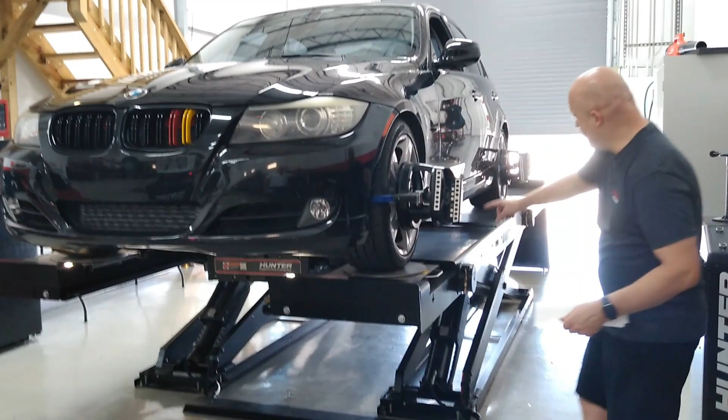It is made by Hunter Engineering. So what is different? This is the latest, greatest that they have, and this is the one with the full options, which has the LED lighting up underneath. So when the technician is working underneath the vehicle, it's very user-friendly for them, where they don't have to have a light.

And on each corner of the vehicle, it's got air chucks, and it fills up the tires by the manufacturer specification by VIN. And this machine is all up to date. It's got software updates 3 to 4 times a year, which we are married with Hunter, and they give us the updates, just like if we're a franchise dealer, like BMW. They give us the update because we have a good partnership with them.

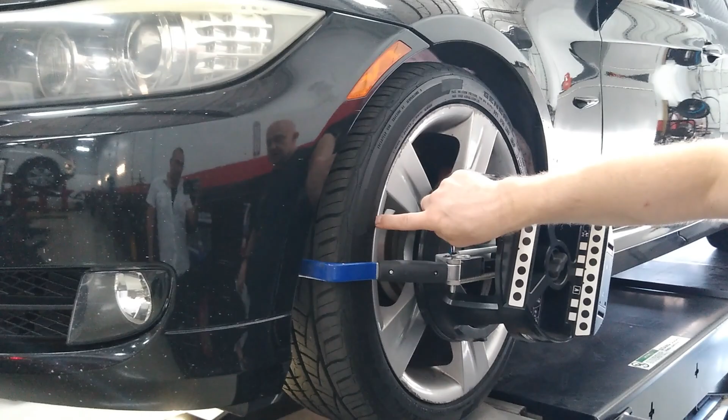And to add to this machine, this has the wheel touchless system where these claws mount on, they grab the tire instead of the wheel. Because if you have really nice wheels, the old styles that grab onto the wheels can scratch and chip your wheels. So this is the latest, greatest. It goes off the wheel. It is covered by a rubber gasket here, so it will not damage or scratch your wheels, and grabs by the tire for true fitment.

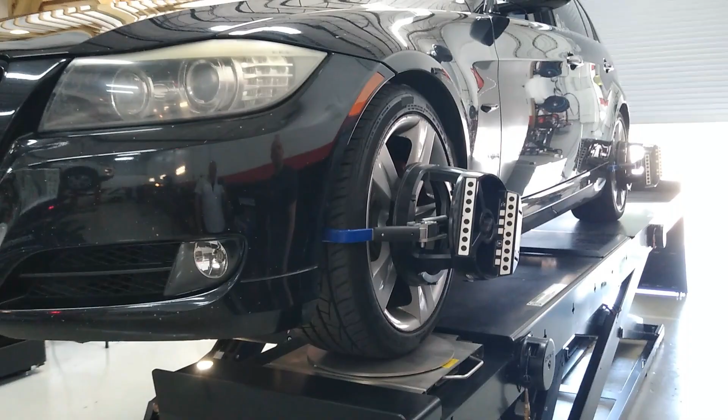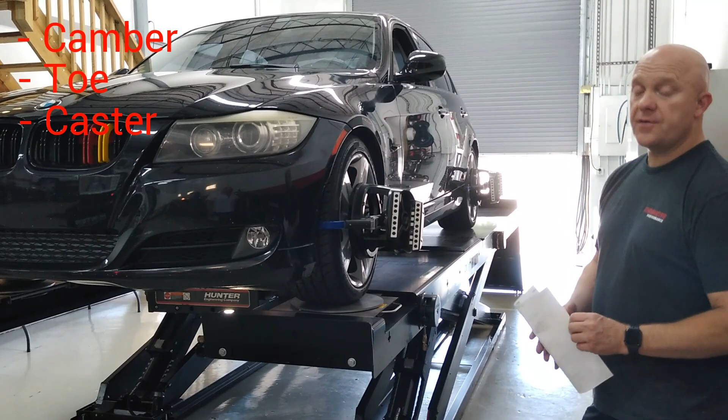So what does the alignment consist of? All alignments consist of camber, toe, and caster. And how do you get all those measurements? The measurements are from the factory, where Hunter has the relationship with most manufacturers, actually all of them. There are some adjustments for camber and caster, depending on the make and model of the car. And we do everything we can within limits to meet all the specifications for the manufacturers.

Okay, can you explain to us what toe means, what caster means? So toe is typically the front tires and the rear tires, how they point in and out. It's like if you're skiing and you snow plow, that's toe in, or if you turn your skis out, your wheels out, that is toe out. Then you have toe in, toe out. And then you have camber, where if you look at the vertical planes of the tire, they tilt in, which is negative. When they tilt out, it's positive.

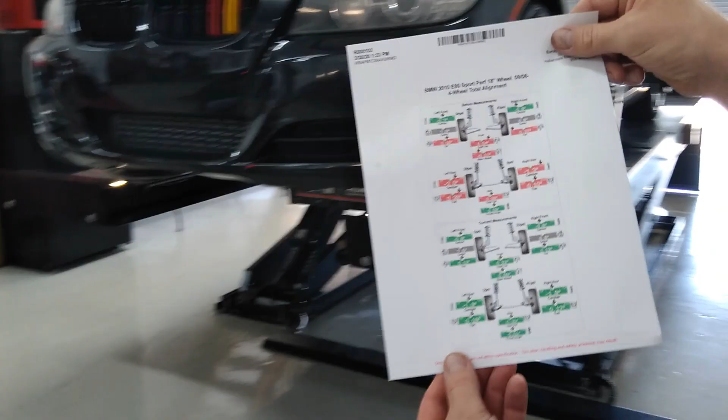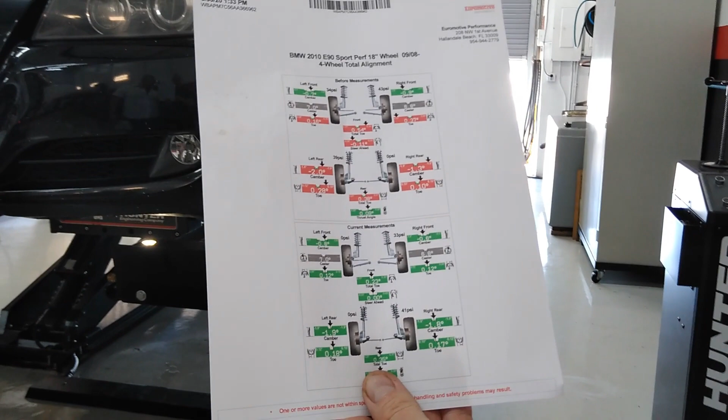And then you got the tracking, which is caster. Caster is where your tires, the measurements between the distance of each tire or center of the wheel - that's the proper way of measuring them. But the machine does that for you with all the downloaded calculations. Here's the measurements, so if you can see here, this is the before, this is the after, but this vehicle does not have caster adjustments from the factory, so they're within limits. And everything is green, so your car is into factory specs.

So what was your question? I'm sorry, how often would you recommend somebody get an alignment? That depends on the drivability, how long, where do you drive it. If you drive it off-road, many more than some. If you live in New York where you have potholes, it depends on the drivability and the driver. So some of them last for a year or two. Also, if you have suspension components that wear out, you got to replace those components before you do an alignment, and then it requires another wheel alignment.

Okay, so what are some of the ways - I know you mentioned the suspension components - what are some other factors that may unalign a car? Or bent, if anything is bent or worn. So let's just say you get into an accident, the unibody or the chassis could be bent. A worn out suspension component can also cause out of spec alignments. And you mentioned if somebody goes in a pothole, that could also cause it. Yes, it will definitely alter the specifications, and you would have to realign it if there's no bent suspension components.

Here, before we do any of that, we do a full inspection on the suspension, so the owner of the car doesn't waste their money on alignment. Okay, so what are some of the key points that you recommend the viewers check to make sure the job was done correctly? Well, we can do that. So every time you do an oil service here, we do a full inspection on it. We look at the tread wear, we take it for a test drive, make sure the car is tracking properly. And most roads here in South Florida are tapered like this for water runoff or drainage properly.

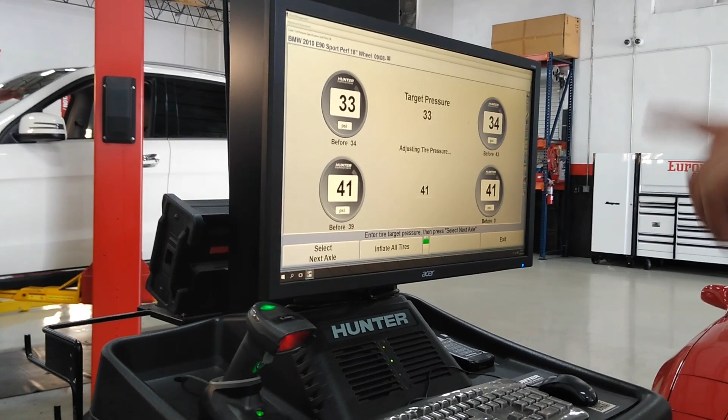So one of the first things checked is making sure all the tires have the same amount of air. In this case, 33 in the front, 41 in the back - that's what the car specifies. You can find that in the door. That's the actual pressure, so they already did the back. Then the actual alignment starts, and then you're ready. You have to take all these things off, and you gotta roll the car back and forth.

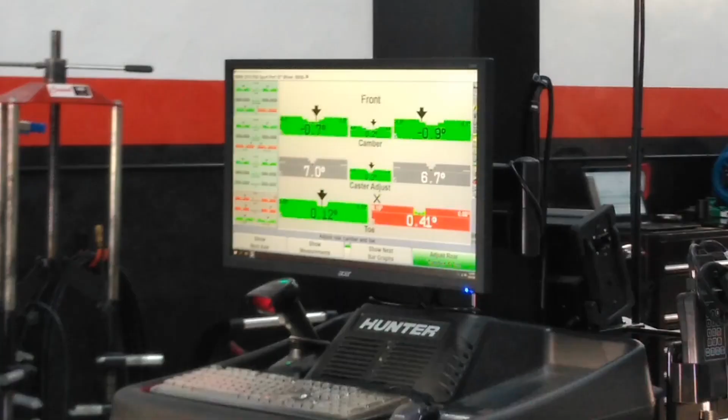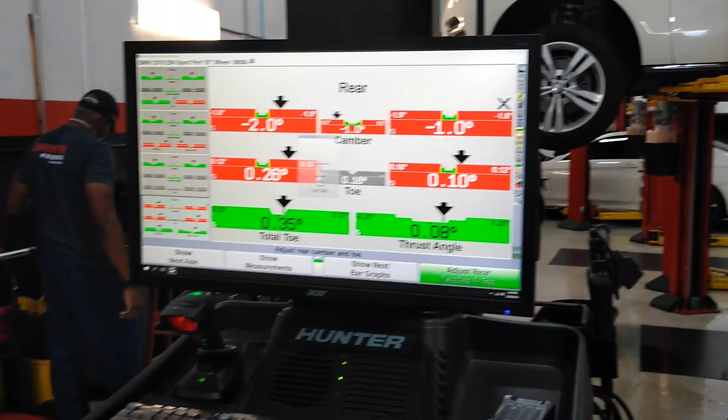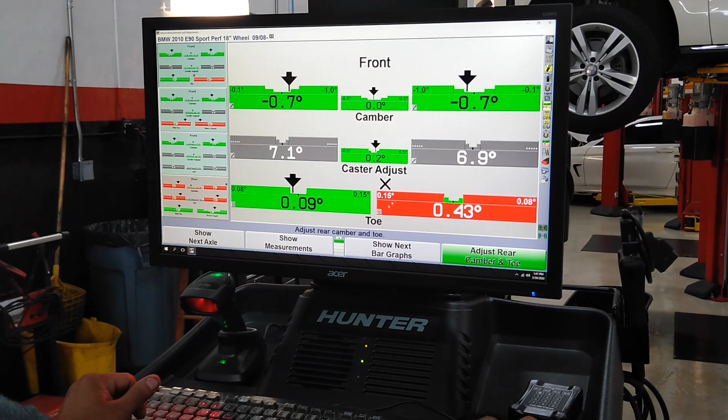The camber is way up. Okay, so rear - this is your toe and your camber, and this is the front. The front camber is good, but your toe is off because of the rear. Once we fix the rear, we can do the front. You start at the rear first and then the front. Look at the back, how it is. We gotta get everything in green, really bad.

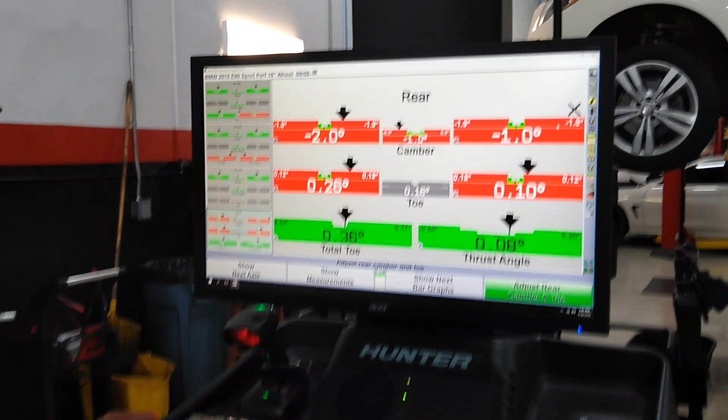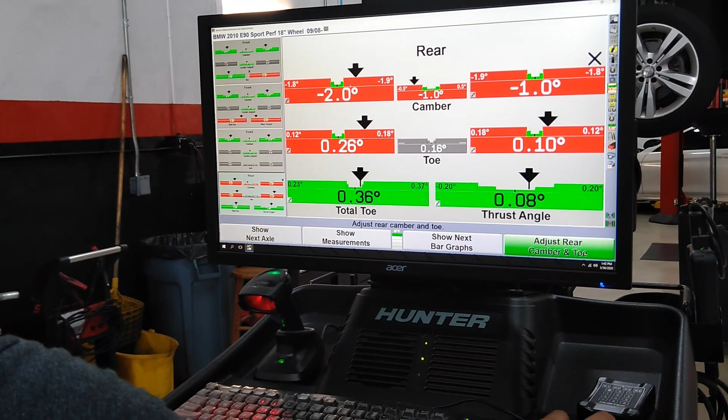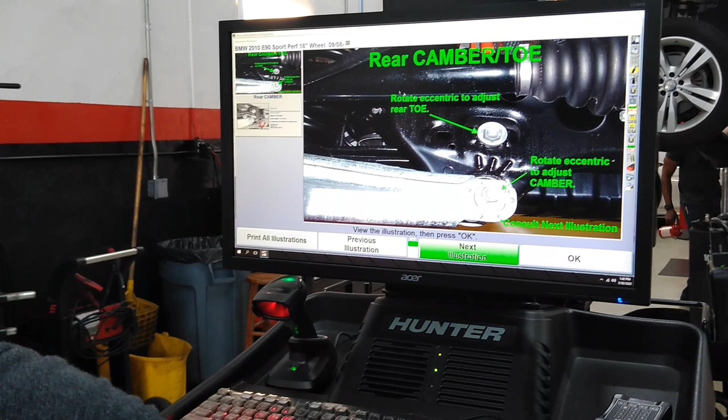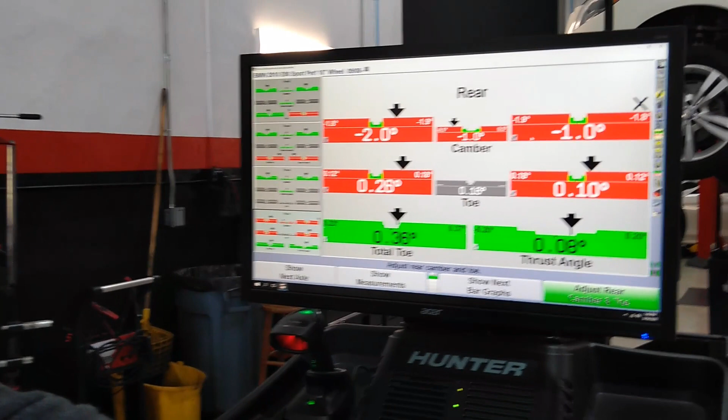So we go here and we see the rear alignment adjustments, and it tells you how to do it. That's where we have to do the toe and camber adjustments. Let's see if we can get this to come in, 'cause it's really out, I don't know why it's really out. Those are the bolts to adjust the camber and the toe - it shows you right there. The bottom arm is the camber, and this one is the toe.

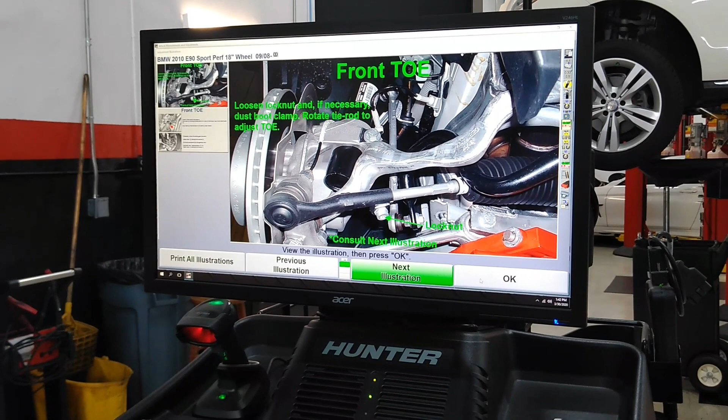Same thing for the front - if you come here, it'll show you where to go. See the toe? That's your tie rod, that's what you do adjustments at. That's what we're gonna do now in the rear. Put the car up and see what we got.

See how far we can bring that camber into. It's really bad, unless it's already adjusted.

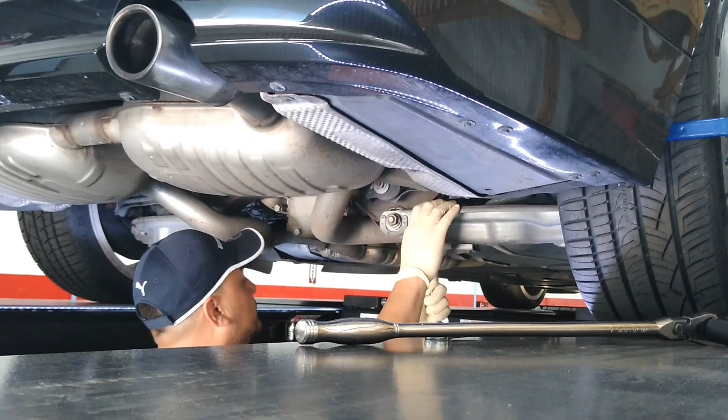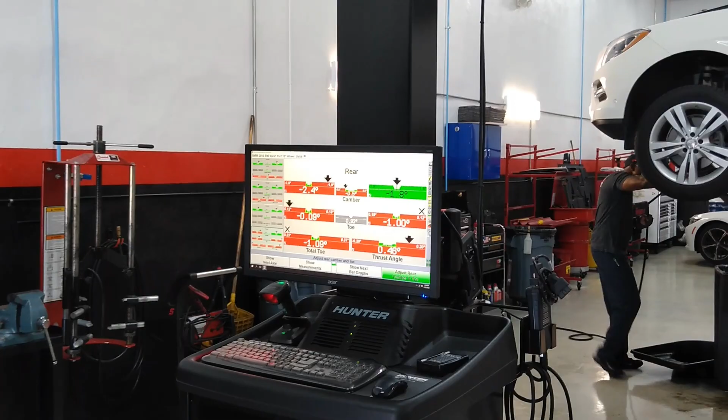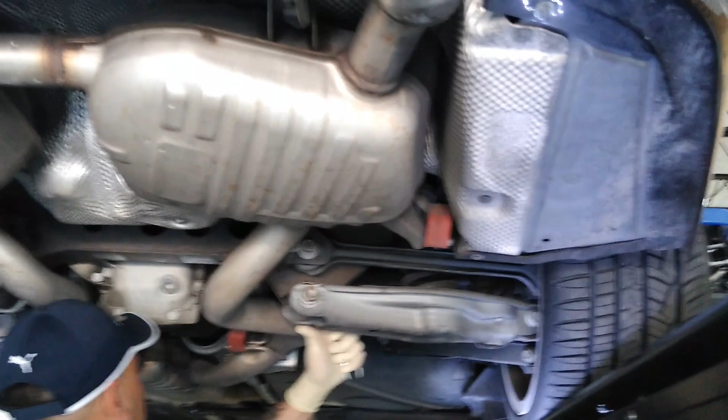Let's see, that's where we want to be at, right? All your suspension components are okay, we can get it inspected. So the upper bolt is the toe - this one's tough, we're doing the toe. Okay, so we probably have to touch the bottom one again because it moved a little bit. You see the camber? Because it has to do a lot with toe, so we leave it loose and then we adjust the camber specs.

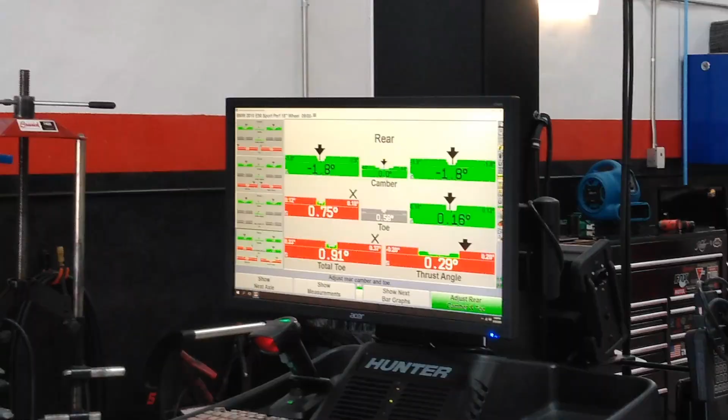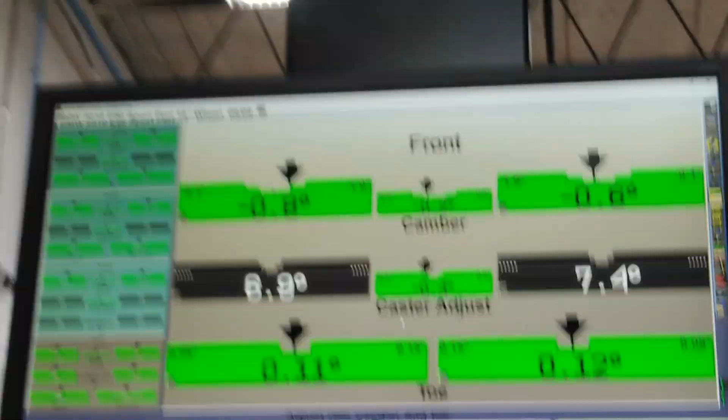To the front. Have to adjust toe, only toe - your camber is good. Now let's check the rear, see what it moves.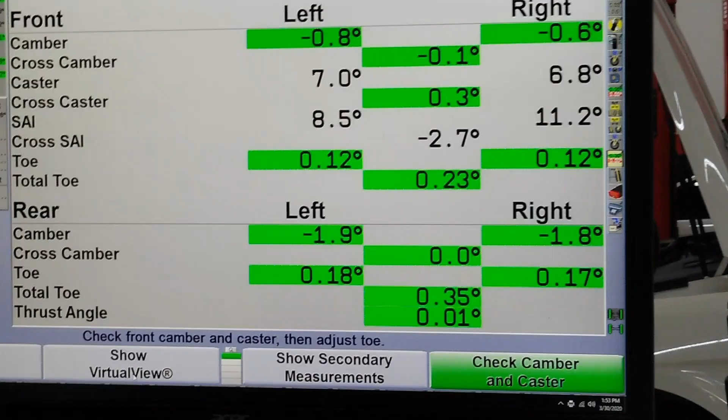Print out to see how it looks, before and after. So the before.

All right, drive the car. Well, at least you don't have nothing bent in your suspension, everything is good. That's a virtual view, that's good news. Yeah, it should drive way better. I don't know how you felt the driving, how it was - it should have been loose, and it didn't pull anywhere.

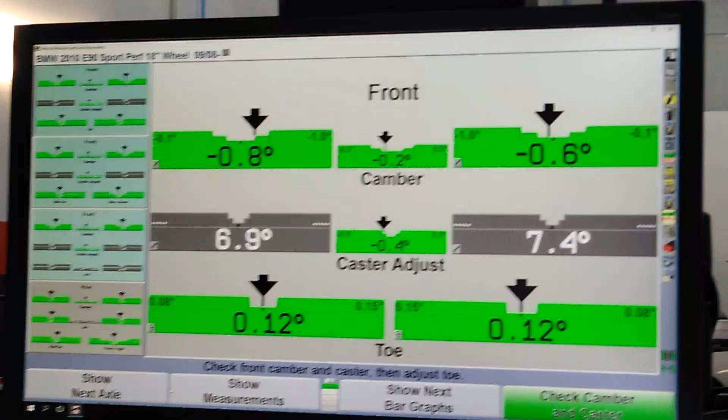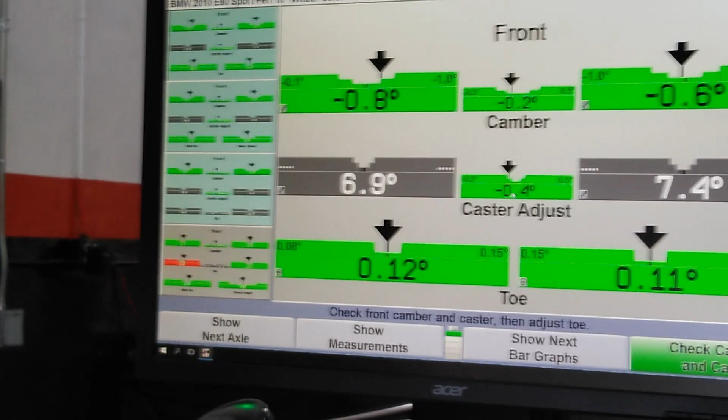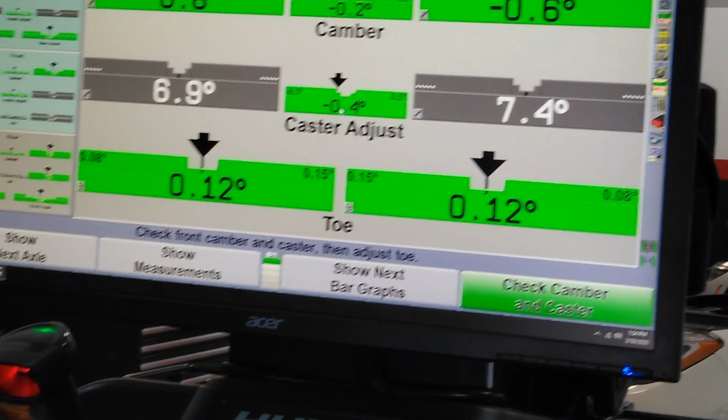He pulled a little bit to the right. Yeah, look here, you're dead on - the steering should be 0. But my tires were bad too, and I noticed before replacing the tires they were eating up the right side in the back, eating up by the inside, and then on the outside. You're eating this right rear on the outside, it was eating it up a lot on the outside, and then the left rear inside, because it's in. You had one out and one in. So the car was not driving well.

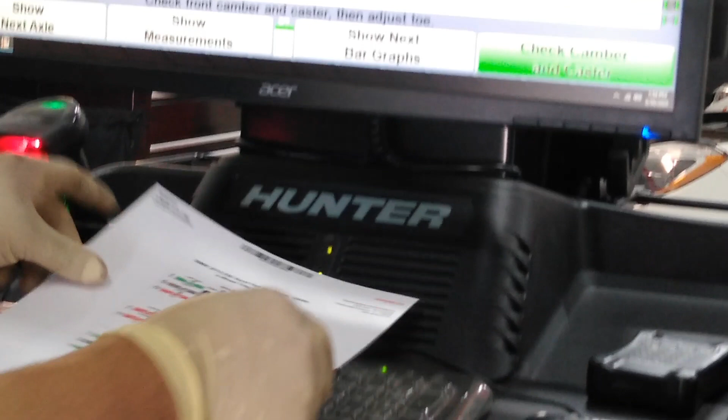When it's negative, what is - well, this is positive is out. Yeah, positive is out and negative is in. So you can see the virtual view shows you - see, this is negative and then positive straight. If you would have seen how it was before, you would have seen the tires straight up. But now since it's aligned, you can see how it is now. When you see the ones before, you'll see the difference. I mean, it has to drive way better.

Thank you very much, Dwayne. Any last words for the viewers?